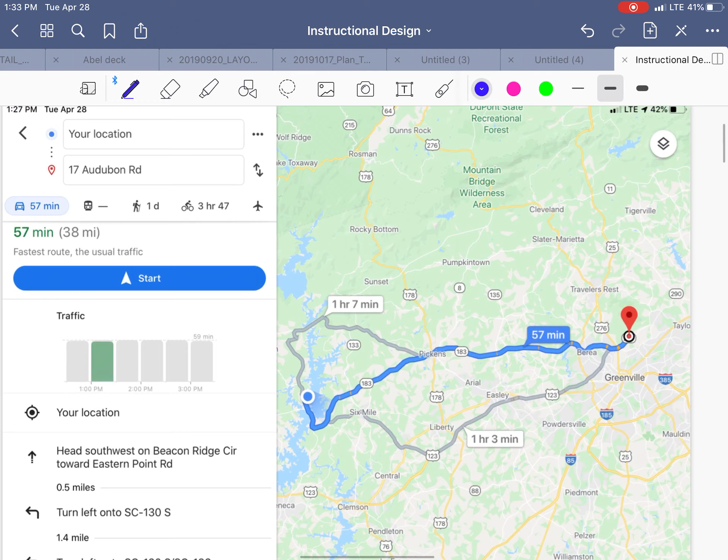I think a good illustration of that is Google Maps or Waze or whatever map program we use. This is a great illustration here.

If we only drive to school or work one route, then that's the only way we know how to get to school or work. But when we have multiple experiences on getting from one place to another, here's a route to get from point A to point B.

Here's maybe our most common route. But when we only know this one route, what if there's an accident in the middle of the route? If we know no other way to get to where we want to go, we're stuck. We have to take that route.

But if we're exposed to other ways of reaching the same end goal, let's take this route to get to where we want to go. If we've got an accident in the middle of our primary route, we can pull into our memory, hey, there's this secondary route we can take and get around that problem and make sense of it.

So I think the same holds true in our classrooms when we're teaching students and learning ourselves. I know that personally I've experienced this over the years, that the more ways that I learn the same material, the easier it is for me to recall that material.

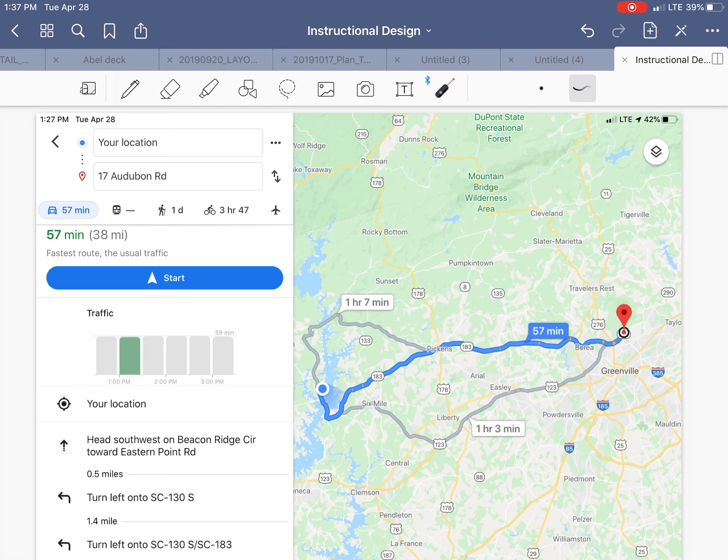If we can make multiple connections for our students, if we can provide the environment and the atmosphere for them to make multiple connections with the material that we're teaching, then we have facilitated this environment for deeper learning and deeper understanding of the material.

So today I want to illustrate this. I want to explain to you or teach you about a construction detail. My hope is that at the end of this lesson that you'll better understand this particular detail because of the multiple modalities that I'm going to use. So in this particular case, this is a job site that is located around Lake Keowee.

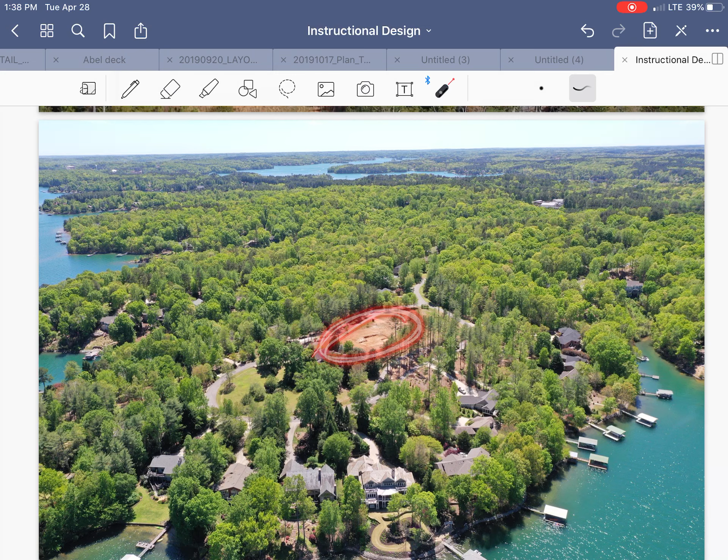Again, I want to make this connection, make this instruction real for all of you. This is a real construction site in a real place that we can all relate to, just north of Clemson and up in the Seneca area, very much tangible to most of us who would be in a class on the Clemson campus.

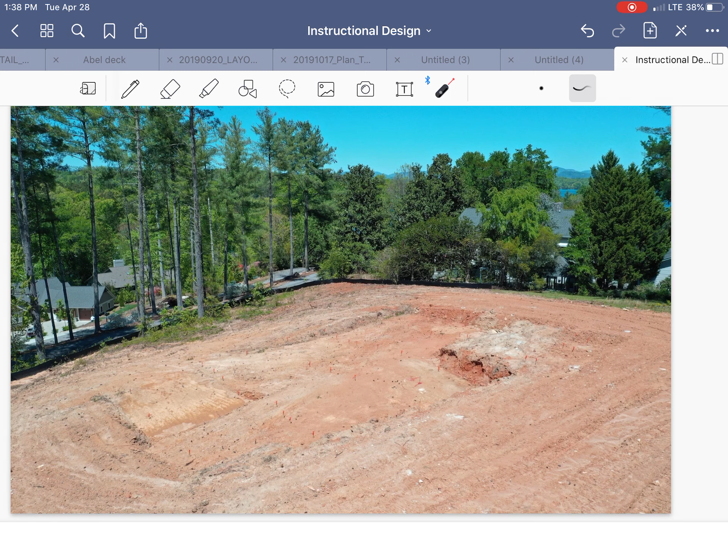Okay, so a closer shot of the site. We've excavated the perimeter of the site here, the foundation that we're about to take a look at. In particular, I want to cover a detail on this foundation and talk about the way that we're getting this detail done. Now we're going to go to what can be more challenging, but is yet one additional modality for covering this material.

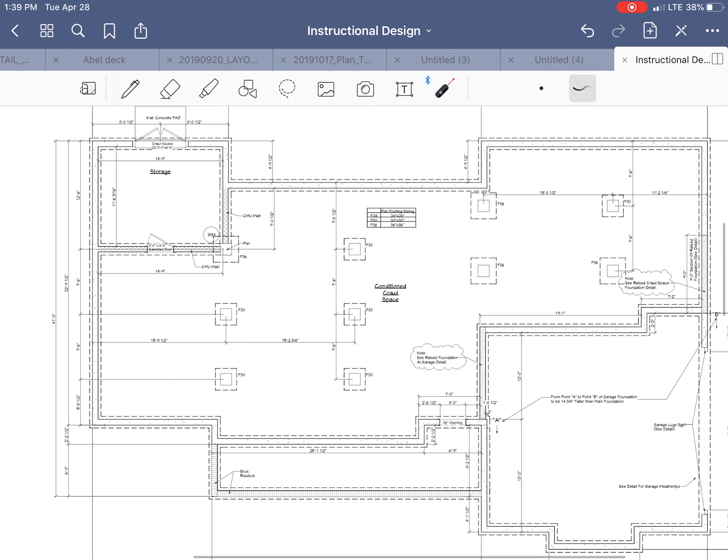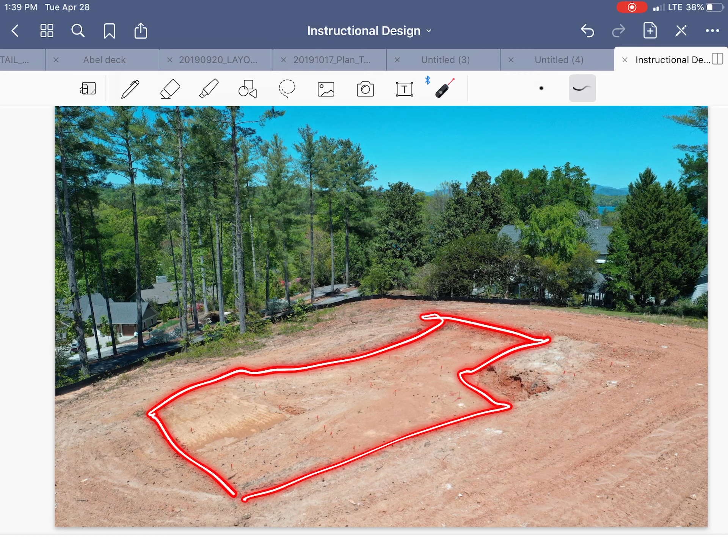This is the foundation plan of the house. So this foundation right here is the exact same foundation that I just traced out in that photo. A couple of things in this particular foundation - just want to kind of reiterate that. Here's the foundation on the site. Here's the foundation in CAD.

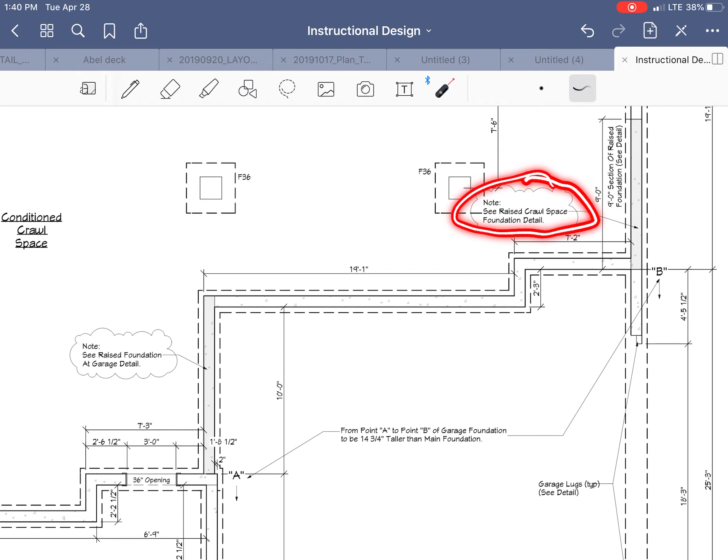We have a couple of details here that are unique, one right here and one over here. These are particular foundation details that need some special attention because they're not typical. So here we say, oh, we have a note - here's a raised foundation detail at the garage, and we have over here a raised crawl space foundation detail. Why do we have these?

Well, first off, this garage is going to be 0 step. So the door to the house from the garage is right about here, and we're going to have no steps in from the garage to the house. Being that this is a crawl space foundation, that means that we need to bring the concrete in the garage up to the same height as our wood frame floor system. And we've got to have a unique approach because we can't just pour concrete against wood. We have something in this area called termites, and they might eat that wood away.

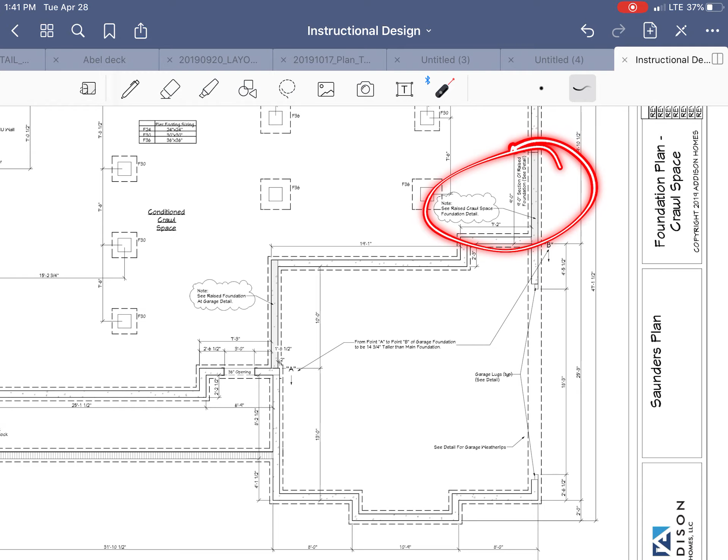Likewise, we need to address grade that comes out of this 0 step entry and then falls away from the foundation towards the rear. We need to be able to bring grade up high against the foundation in these two locations. Okay, so we've looked at this, we've seen a photo of the site, we actually have seen now the foundation. Now I want to go into a little more detail.

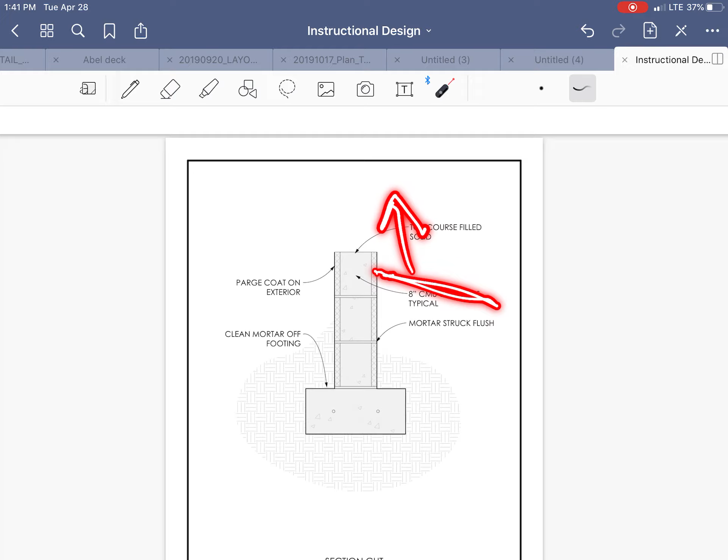Here's our typical foundation. Our floor system would sit on top of the foundation like so, but we would be limited to only backfill about 6 inches down from the foundation. We can't bring that backfill higher against the wood that's going to be here. So this special detail that we need is pictured here.

And we've got a little closer up cross-section detail that is quite different than that foundation view that we looked at. And yet it may be easier to picture what's going on here.

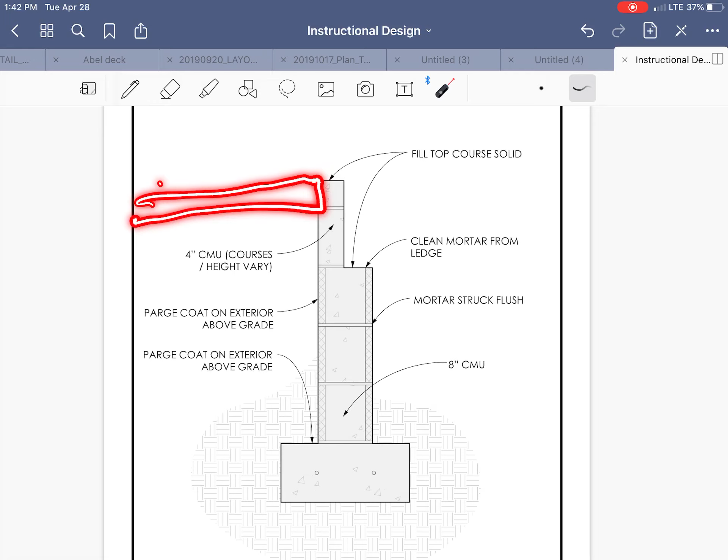With this, we're going to have our floor system back here, and it's going to reside behind this step up of masonry. With this configuration, we can bring the grade up to the top of this for our concrete level to make a 0-step entry into the building that becomes flush with our floor system, okay?

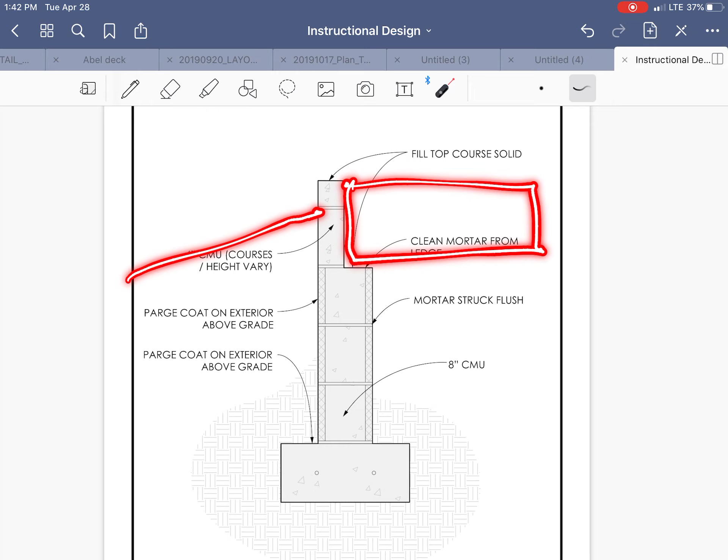Or on the side where we're running the grade out, we can bring grade on the outside of the building up higher and not have to worry about backfilling against this wood floor system that ordinarily would be a problem without this masonry section there.

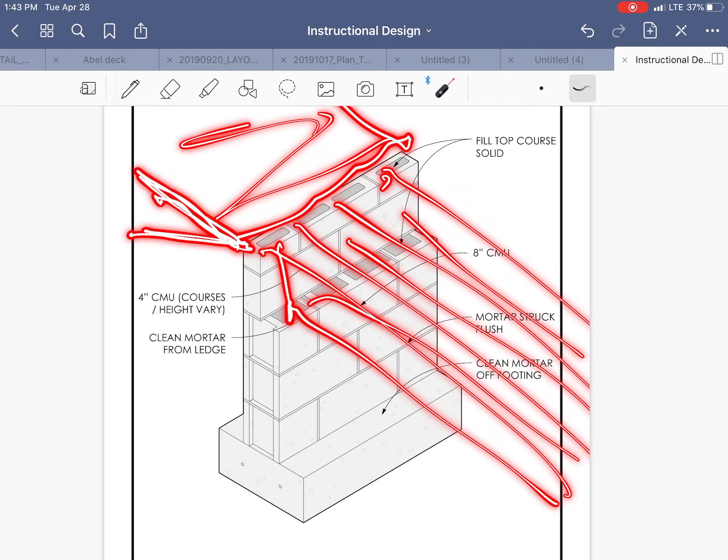Okay, and yet we've got this cross-section view, but I think even more importantly, a different modality, a different image of this configuration is right here. Now we can see this in an isometric view, so we can tell more of what's going on. We're going to have concrete up to this height back here, all the way across, and then our floor system will come off this way and kind of come off the floor there. So we'll have solid floor, solid concrete meeting with the masonry as the junction in between.

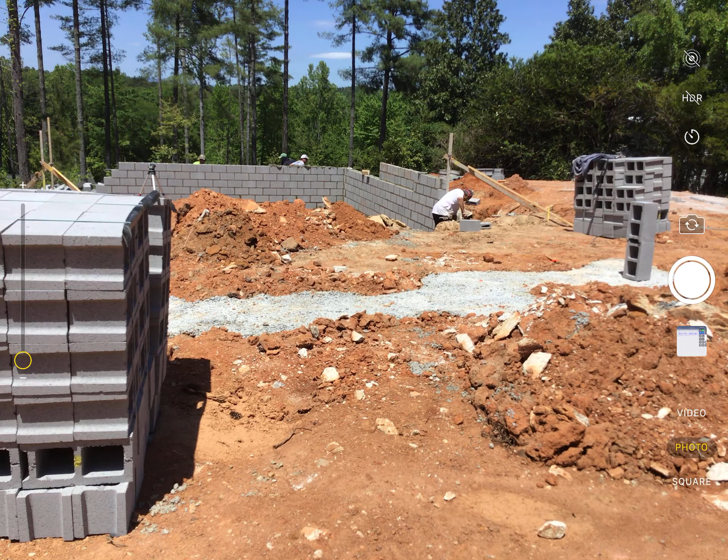So I'm going to shift gears now, and we're a little over time, but I want to make the connection to real life. So here we are, we're on this job site, here in person. Pretty cool. I want to connect the dots here. We've looked at the schematic, we've looked at the site as an overview, but we're here live and on site.

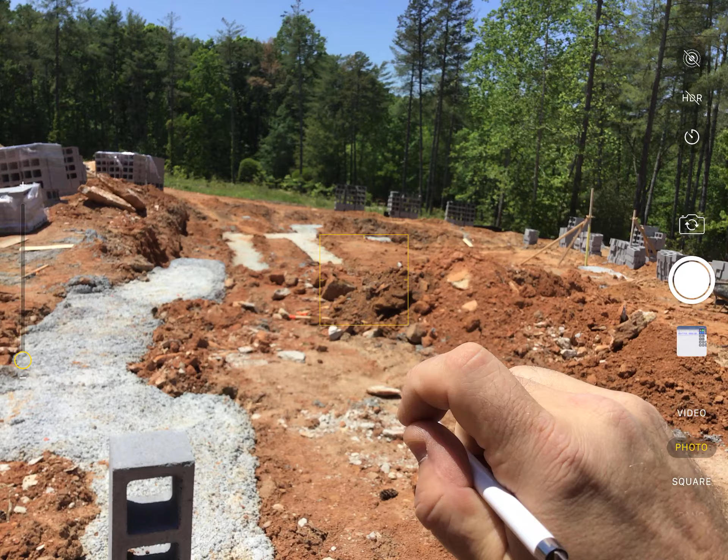So if we stand here, from looking at our plan, this will be the garage of the house. You see the footings already poured. We'll have one of these zero-step details back behind that pile of dirt. And then this is the section where our concrete from the house is going to slope down and begin sloping away from the house, but we may need to keep it up high and let the dirt backfill against masonry instead of framing. So now we're going to take a look at this in real life.

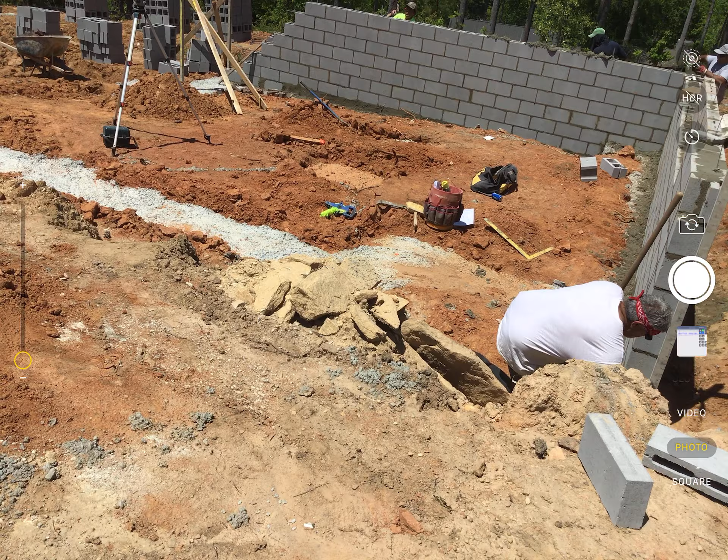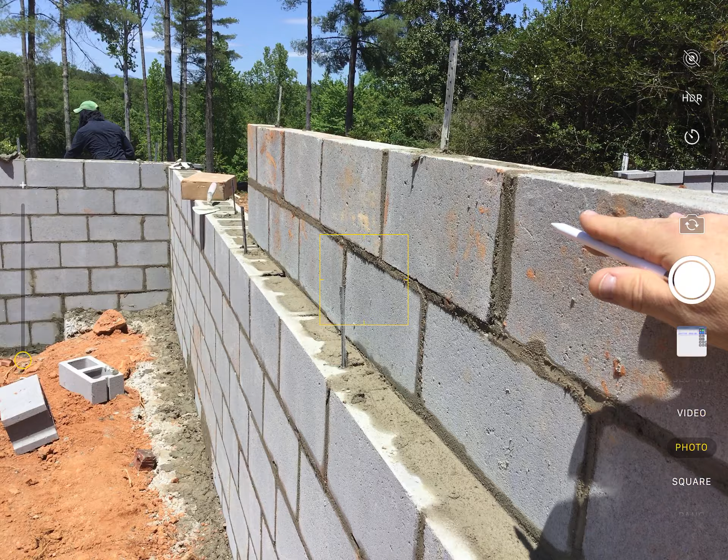So we looked at our detail, and now we can see it in real life. Our masons are here working, laying this block up, and here's the ledge that our floor system's going to sit on. Our floor system's going to come up to here. We're going to have a treated plate on top, and our subfloor is going to come across, and that allows us to backfill on the other side of this wall. It allows us to backfill much higher, where we're going to have wood framing back here in this direction and backfill on the other side.

Likewise, in the garage, we're going to have concrete that comes up to this side, and then the floor system comes across. So when we use these multiple modalities, my hope is that these connections that we're making are making a stronger case and a stronger learning experience for all of you.

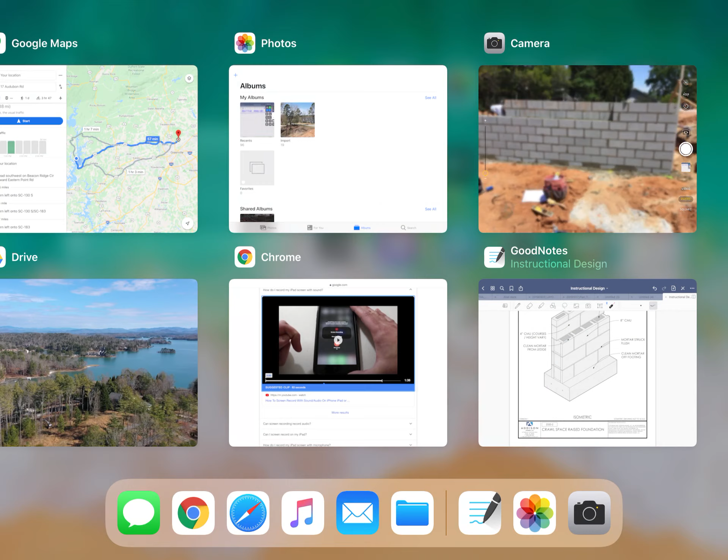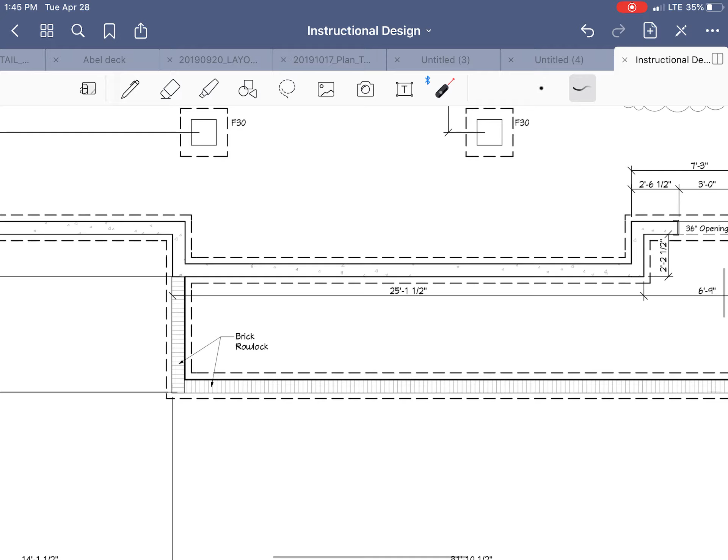My hope is that after this lesson, you better understand this detail. Let me just flip back to here's the detail that we had in our isometric view. Very helpful, much more beneficial than a section view, but yet the section view is still pretty clean. Our floor system's behind there. And then the actual 2D view or single dimension view here, not so helpful, right? So we say raised crawl space detail right here, but it's a heck of a lot easier when right here is actually right here.

My hope is that seeing this and making these connections, not only do each of you have more connection points to make with this material, but that I've been able to illustrate to you that in the classroom, when we can use multiple modalities of instruction, we can have very powerful outcomes for more connections with our students and the material, and that those connections become cues. So we have cues that our students can then use to relate this material and connect it back to the learning, and that the learning outcomes are stronger because of these multiple modalities.